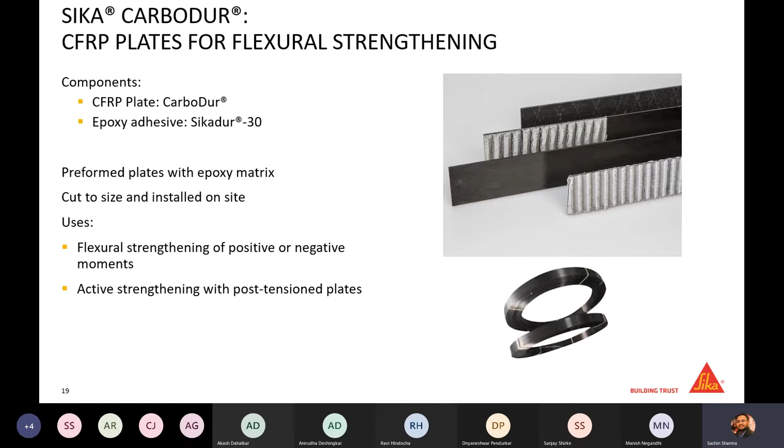CarboDur plates are fixed with epoxy adhesive called Sikadur 30 LP. This Sikadur 30 LP is basically a 25-year-old epoxy adhesive used by us. It is a thixotropic material, and it will act as a primer, as putty, as well as adhesive. So basically a multi-purpose material used for fixing these carbon plates.

You can see in the photograph how these plates are fixed in the RCC member, and this person is removing the excess epoxy post application of this FRP plate.

This epoxy has a beauty that you can apply if you want to use 2 or 3 layers. The plate on plate application can be done with the same epoxy material. You don't need to use different material, and this material can be used for steel, masonry, wood - all kinds of substrates.

If you talk about the properties of Sika CarboDur, there are different grades available in India. The surface applied CarboDur plates have a thickness of 1.4 mm and a width of 50 mm and 100 mm. In the photograph, you can see there is a name mentioned on the plate.

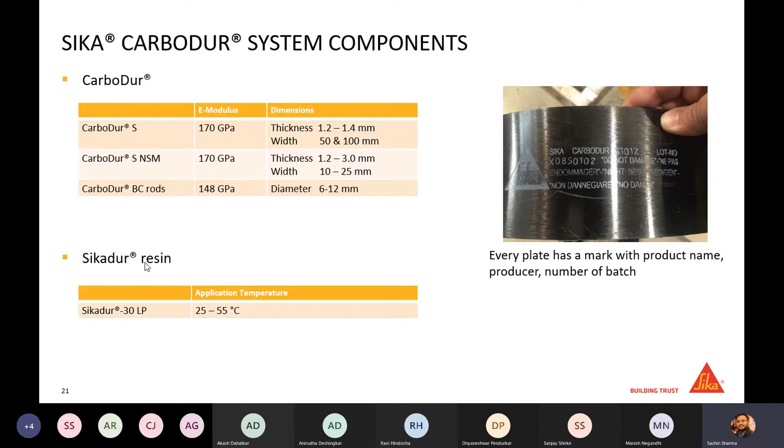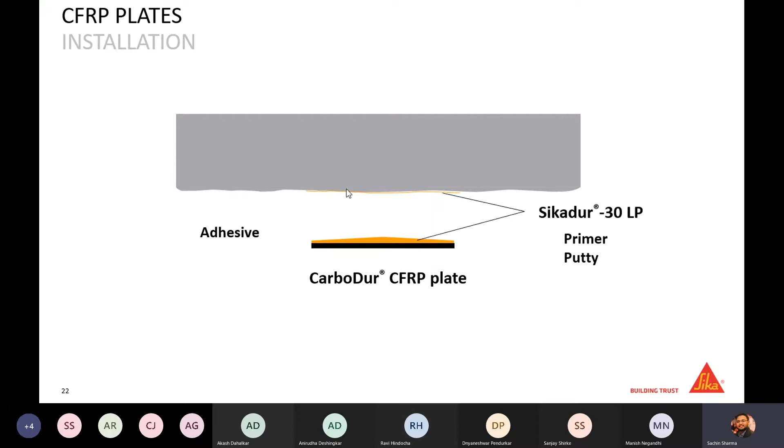For installation of this CFRP plate, if this is your substrate, first you need to put the putty of Sikadur 30 LP epoxy, and the same material needs to be applied on the CarboDur plate as well. This plate can be fixed on the RCC surface just by hand and roller.

So this is how the application of CFRP plate works. This is a very easy and fast application. You can strengthen any flexural deficiency just by pasting these carbon plates on the RCC member. So this is the beauty of this system.

When we talk about the next segment, this is called NSM - near surface mounted. The full form of NSM is near surface mounted reinforcement. In this case, we cut grooves in the concrete and fill them with Sikadur 30 LP or a different epoxy.

Sikadur 330 can be filled, Sikadur 300 can be filled. We can suggest different grades of epoxy depending upon the requirement, and we place these carbon plates. These carbon plates have different widths depending upon the deficiency, and they are fixed inside the epoxy resin, increasing the flexural capacity of any RCC member.

These are basically used for negative bending moment, like cantilever portions, where we need to fix the FRP from the top side of the RCC member. So we generally use the NSM system over there.

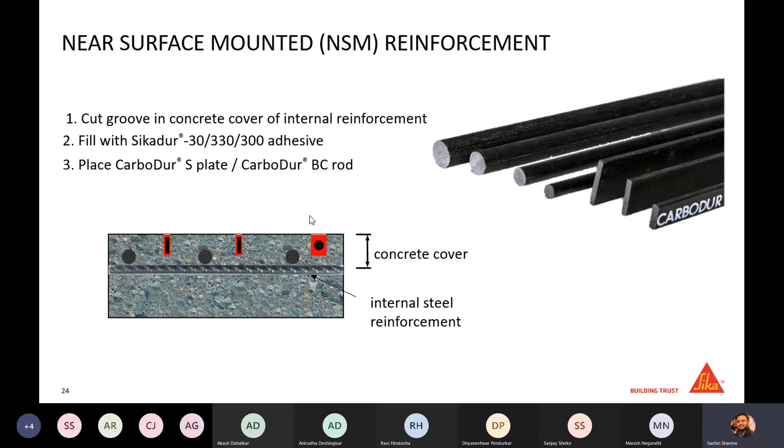If we see the different advantages of the NSM system - it is very optimal. It does not need any end anchorage because this complete system is filled with epoxy and fits inside the concrete, so no additional end anchorage is required. It is useful when the substrate quality is poor and we do not want to spend more on surface preparation. In such cases, we can just do groove cutting and fill the groove with the NSM rods.

It is actually invisible strengthening also, because post strengthening nobody can judge whether the system has strengthened or not.

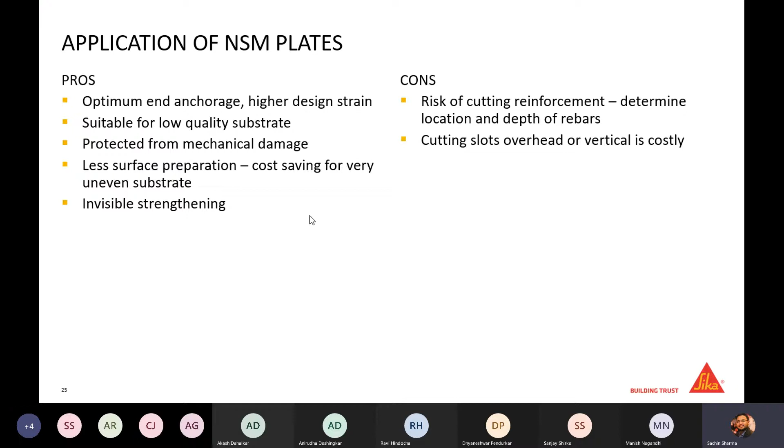Some limitation with these NSM rods is that you need to cut the RCC, and while cutting, you need to keep in mind that you are not cutting the reinforcement. So first we need to check where the placement of the reinforcement is, and accordingly we can create a groove. The cost of this groove cutting of concrete is also one of the costs in such cases. But we see a typical application when we have a negative moment in the slab, or a deficiency in the top reinforcement, where we can certainly use these NSM plates.

Where we need to strengthen masonry buildings or old structures, these NSM rods are very much successful in such areas. For wooden structures, this is also one area where NSM rods have shown positive results. One example is in Italy, where a historic masonry tower is being strengthened with this FRP NSM system, in which BC rods of 5mm diameter are being used for strengthening this old masonry building.

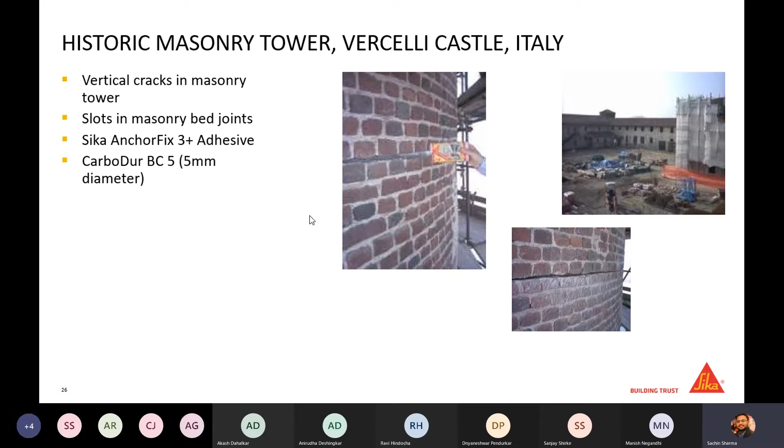Other than Sika Carbodur rods or the NSM system, we have a different system called Sika Wrap. Sika Wrap is basically a fabric kind of material made of carbon, which is used for confinement of RCC structures or to increase the shear strengthening of RCC.

These are basically unidirectional carbon or glass fabric materials, used with epoxy adhesive. There are two types of epoxy used for adhesion of this system: one is Sikadur 330 and another is Sikadur 300. I will explain in upcoming slides where to use Sikadur 300 and where to use Sikadur 330. After application of this epoxy, this fabric acts as a laminate, and it can also be used to increase the flexural capacity of the structure.

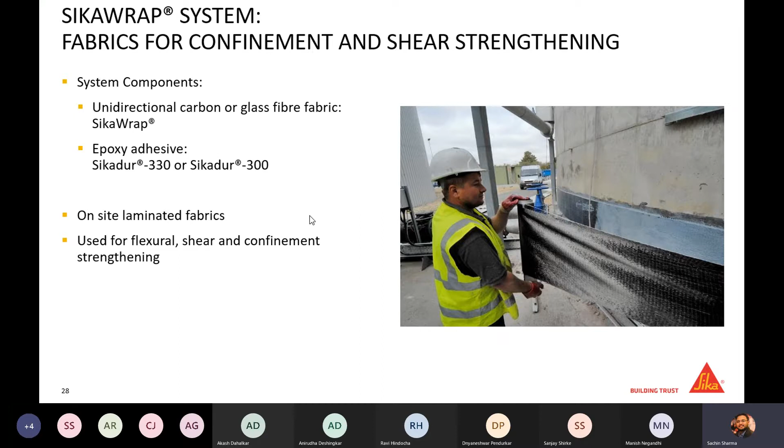But we have generally used it in shear and confinement of the RCC member, because one comparison has also been done in ACI, where if you apply 3 numbers of Sika Wrap or carbon fabric versus a single carbon plate, this system will not be economical in flexural strengthening.

When we talk about the product range of Sika Wrap, there are different grades of carbon fiber available in Sika's range. One is 230C, which has 230 GSM of carbon fiber inside it. All these values show how many grams of carbon fiber per square meter the material consists of. So 230 GSM means 230 grams of carbon fiber weight for the carbon sheet. 300C means 300 grams of weight for 1 square meter of carbon sheet. Similarly, 450 GSM, 600 GSM, and 900 GSM carbon fibers are available.

All these carbon fibers have different thicknesses and different tensile values. So once we design this FRP system, we can opt for any of the FRP fabrics depending upon the deficiency we have. We also have 2 types of glass fabric available: one is 430G and 930G.

Additionally, we have Sika Wrap FX50C and Sika Wrap 350G Grid. Sika Wrap 350G Grid is basically a glass fiber grid wrap that is used with a cementitious matrix. All the other systems are used with an epoxy resin matrix. These are 2 types of epoxy resins: 330 and 300.

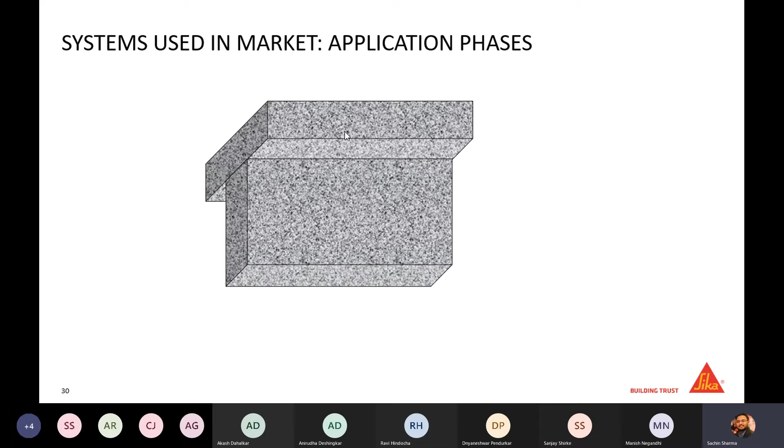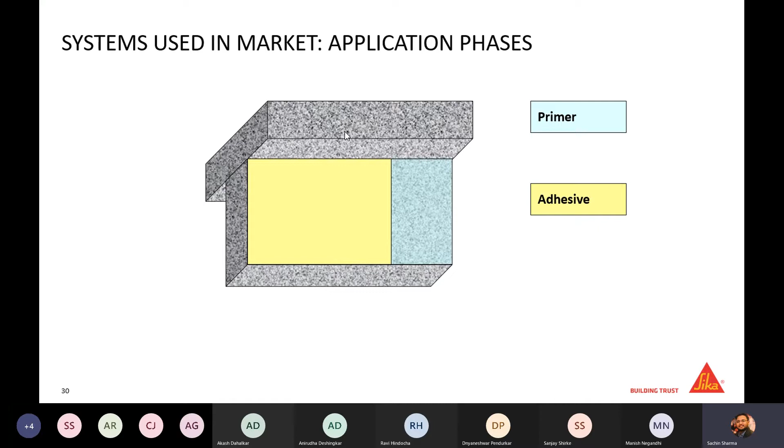So this slide I have prepared to differentiate between the systems used in the market and what Sika recommends. In the market, the available FRP system is: apply a first layer of primer, then apply another layer of adhesive on the RCC system, then apply impregnating resin, then apply fabric, and again apply resin. That means the fabric is still dry during the application, and this methodology is applicable for all GSMs available in the range.

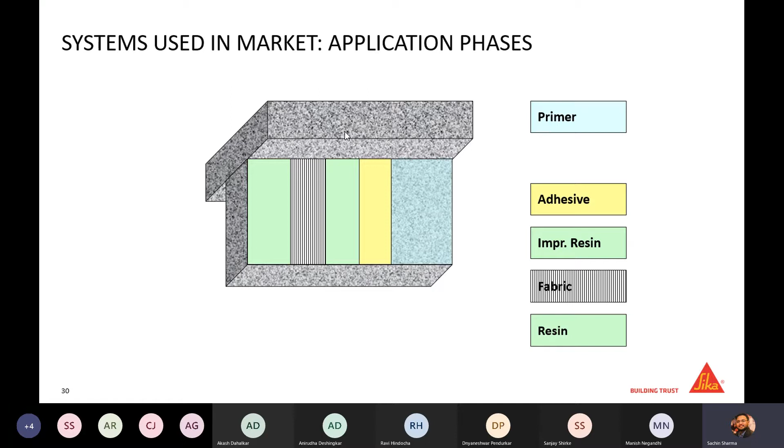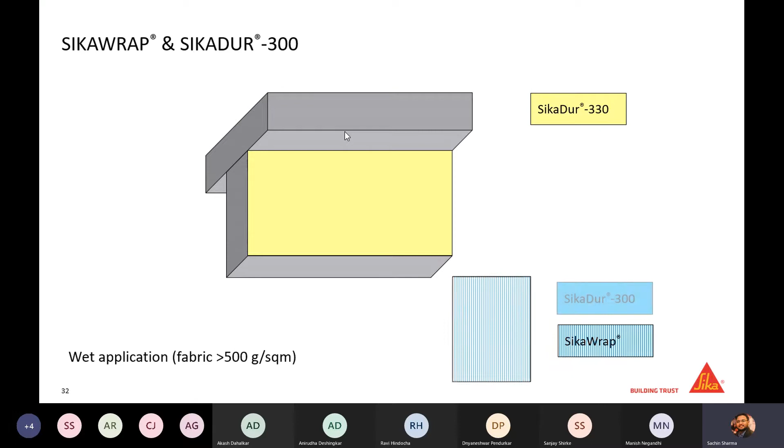What we have seen is, in such cases, the fabric will not get impregnated fully. So for greater GSMs, for GSM which are greater than 500, we always recommend to have a wet system in which Sikadur-330, the concrete primer, needs to apply on the concrete surface, and this SikaWrap needs to be wetted properly on the floor before application on the RCC surface with Sikadur-300 impregnating resin. Once this is wetted, we apply this wet wrap on the RCC system. This is called a wet layup system.

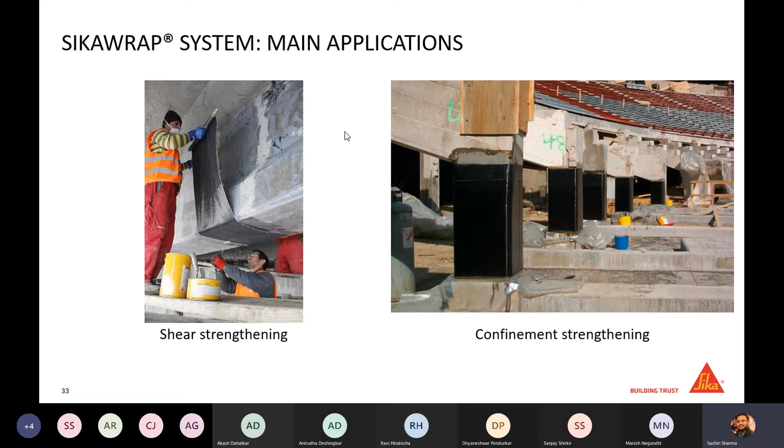This is being used for shear strengthening and confinement of the column. We can have different types of application or different types of systems for increasing the shear capacity. We can have 3 sides of confinement, 4 sides of confinement, or 2 sides of confinement, depending upon the site availability.

Next product, or the next solution in terms of structure strengthening, we offer is SikaWrap FX. This is one of the beautiful products that Sika only provides. No other manufacturer offers this kind of material in the market currently. This is basically a carbon fiber string, having 50 grams of weight per meter, and this material has a variable application.

This is a very multi-purpose product and can be used in shear, flexural strengthening, and confinement as well. It can be used as NSM. It can be used everywhere. That means this is a single product you can use in any location, anywhere you need.

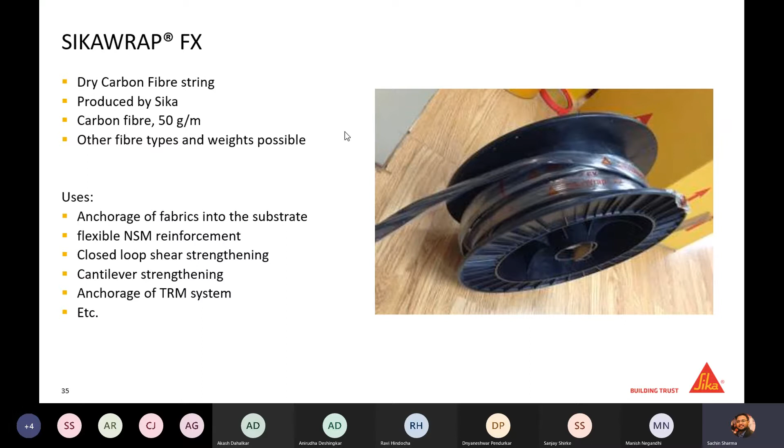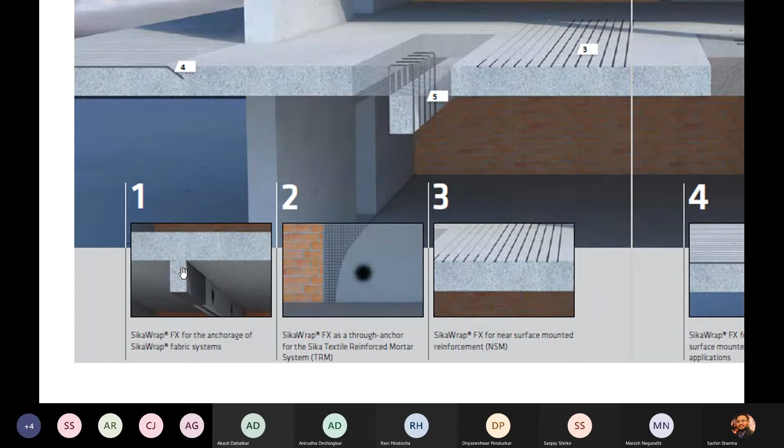But you can see here in the picture - is it visible, is it readable to all? Because I think the lines in the bottom portion of the slide are not readable to me. I will try to zoom it. Now I guess it is visible.

So you can use it as an anchorage for the FRP system. You can use it as a through and through anchor for textile reinforced mortar system-based applications. You can use this system as NSM, like this.

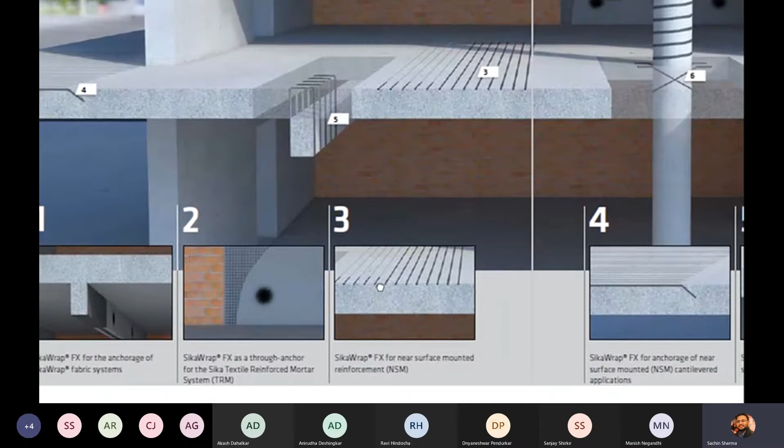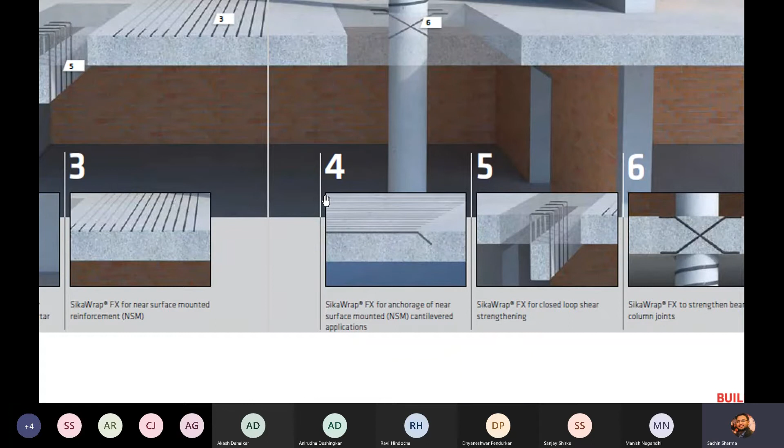You can use this system as negative reinforcement in area 4 here - we have used it as negative reinforcement. You can use this system for increasing the shear of the beam, like they have used in number 5 here.

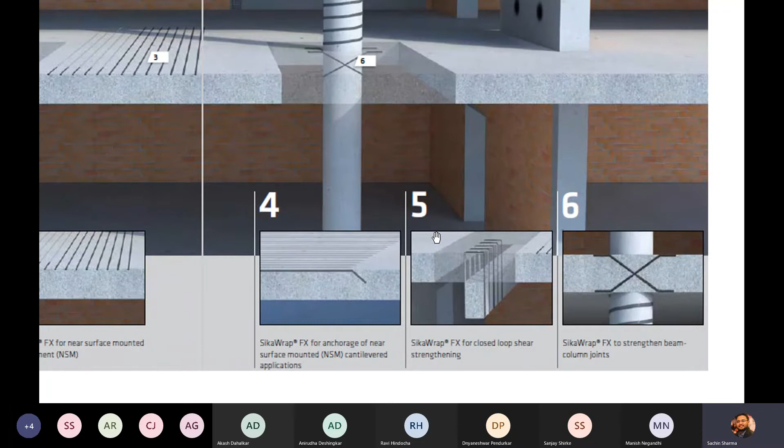And this column and beam joint can also be strengthened with this FX50 product. So this is a very beautiful product that Sika offers, and this is the only company that offers this kind of fabric string.

So if you compare two systems in which the beam is 4 sides wrapped - one with SikaWrap and another with SikaWrap FX - for application of this wrap you need to cut this slab and then apply the wrap, or you can have 3 sides of layer, you have 2 options in this system. Whereas in the SikaWrap FX system, you need to drill this and fix the string, and post application nobody can see that this beam has been strengthened with FRP. So this is a very wonderful product.

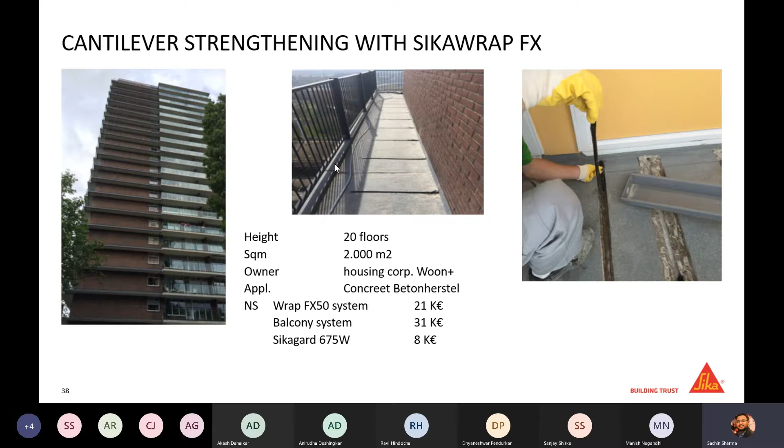So this is the reference where we have used this FX50 for strengthening of this cantilever balcony, where we have put it on the negative side of the slab.

So what we have understood is we have CarboDur plates and NSM plates, which are being used for flexural strengthening. We have Carbo shear, or Sika wrap, which are being used for shear strengthening. We have Sika wrap FX, that is a multi-purpose product, and it can be used for flexural, shear and confinement in all cases.

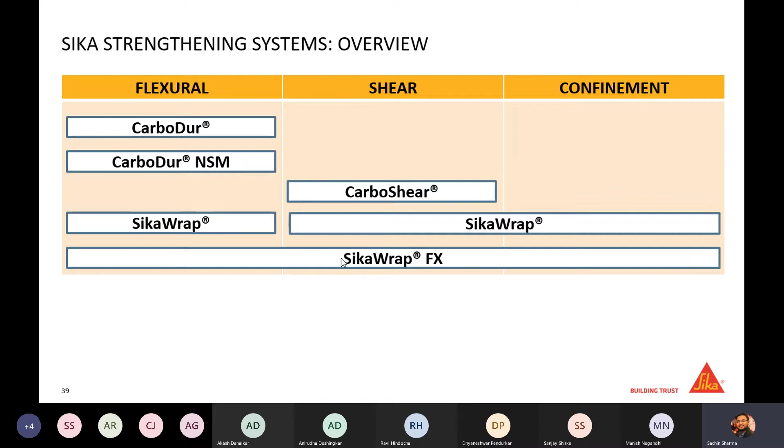Then we talk about why Sika. As I said, we have been in this industry for the last 25 years, and we have a large number of project references. So Sika has very rich experience in this subject. This is why we can say we have expertise in this subject.

The quality of product we offer to the market is a very high standard product. The glass transition temperature is greater than 100 degrees Celsius. This is a unique thing that Sika is offering to their customers.

Testing of durability. We have undergone various tests for our products and we have seen it is very much durable for more than 20 to 25 years. One of the testing is still going on from 1980s till date in Switzerland, for Sikadur epoxy adhesives, and we are testing this epoxy adhesive for durability of 50 years.

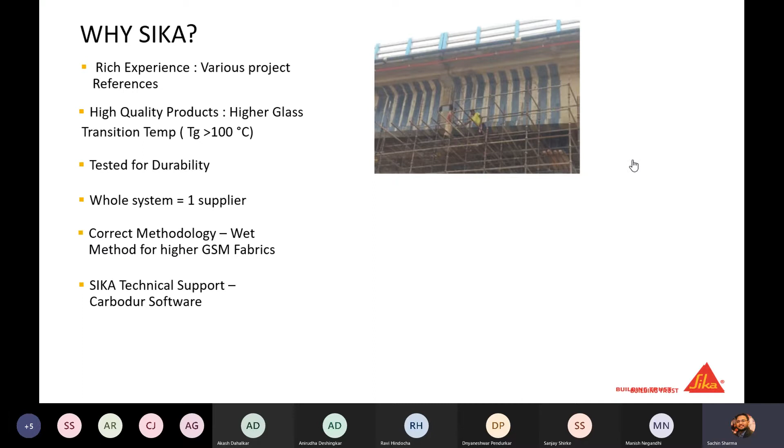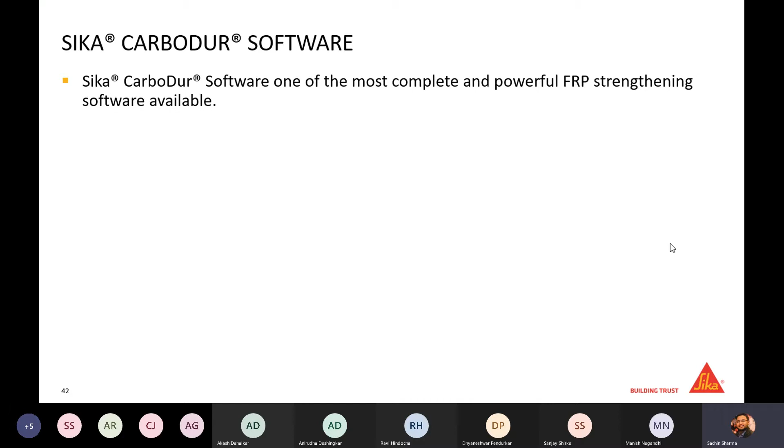Coming to the Sika CarboDur software introduction - people have already installed it, so I will not take much time introducing this software. However, I can say this is the most powerful tool available currently in the market for designing this FRP system. It is available free of cost at Sika.com or the Sika India website, and it is available for 15 days post downloading. Once you do the online registration, it will be licensed for you freely. So it has 5 modules.

You can select any of the 5 modules for designing this FRP. First is the carbon fiber column - the axial capacity increment of column. Second is the flexural increment of beam. Third is shear increment, or shear deficiency if it is there in the beam. Fourth is also the same, the flexural deficiency in the beam.

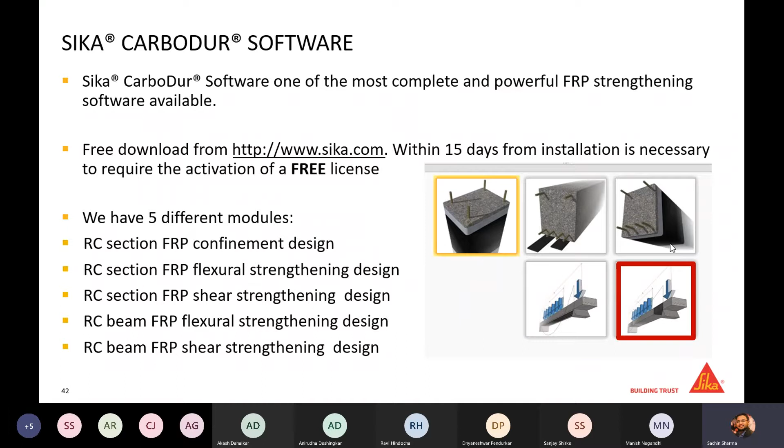But if you have variable loads in your structure, then you can opt for the fourth one. Similarly, if you have variable loads with shear deficiency in the beam, you can select the fifth one.

When we talk about the advantages of the CarboDur software, this is a very professional software. You can design or produce different sections using the software - there is very little limitation on using a different variety of sections. You can use T-beam, I-beam, and different sections like this. Complex geometries can easily be done with this software.

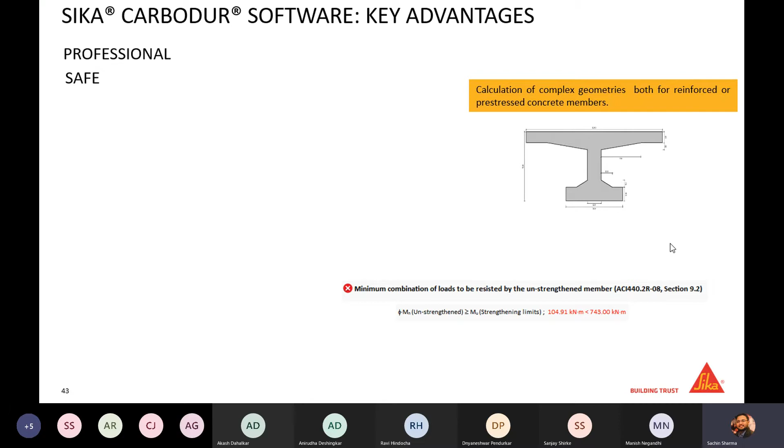This is safe because it shows you an error when you design anything wrong - the software would not allow you to proceed. So once you use this software, you will also see that if you are putting in an incorrect value, it will not allow you to move further. So that is why you can say it is safe.

It is user friendly because it has very good graphics. You can easily understand it using the graphics, and if it is not clear, you can select any section and a tab will appear where you can read about it. If it is still not understood, there is a help tab available on the top right of the area - you can select it and get detailed help. So this is a very user friendly software, and every structural engineer can easily understand it very well.

It is free of cost. It updates automatically, and there is no black box available. All the reports, all the results that you generate, are produced in PDF format, and this report will have the complete formulas based on ACI 440 or whatever code you have selected.

You can use different codes for designing this FRP using this single software, because this is a global software. So people use the same software for different industries, for different codes. So what I was telling you is there is no black box - all the things are clear in the report.

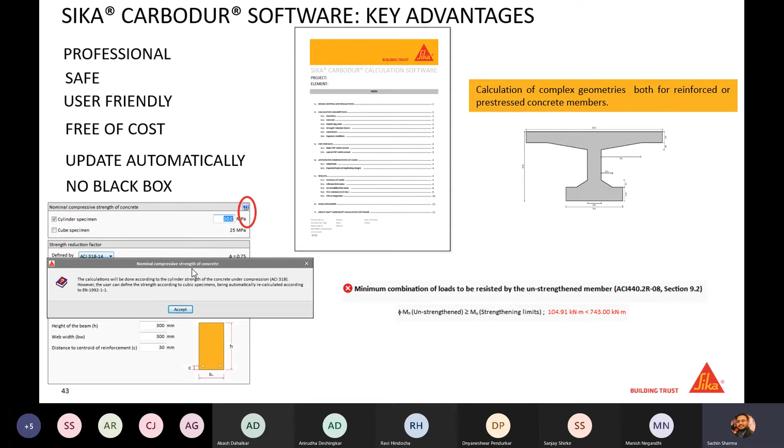So moving toward the FRP design, I wanted to ask if there is anything not clear in the presentation till now, or otherwise we can move further to the designing part.

I think it is 2:22 and there is only 20 to 25 minutes, 20 minutes left. I will move a little faster.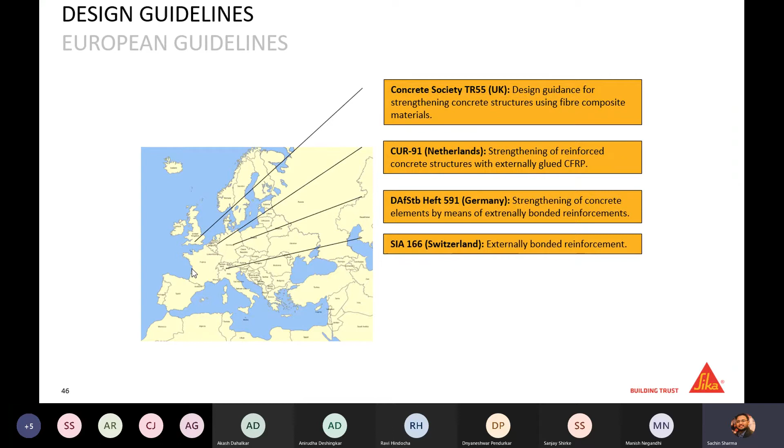Talking about the design codes, there are European design codes for different European countries. The UK uses TR55. Netherlands uses CUR91. Germany has their own different codes. Switzerland uses their own codes. All the major European countries are using their own codes.

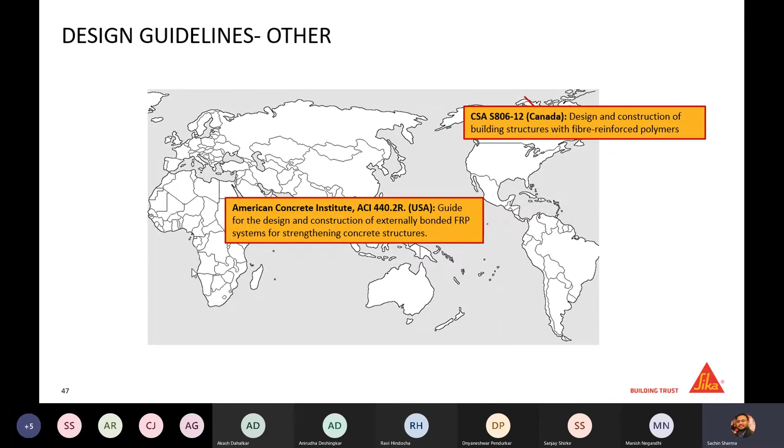India is using the American standards, so here we are following ACI 440.2R only. Canada is using their own code, and Japan also has a different code.

So here today in our presentation, we will discuss ACI 440.2R, which is commonly used in India. It covers the design for flexure strengthening, for shear, for confinement, for increasing axial capacity by confining a column in case of axial loading, and in case of eccentric loading you can also use this. ACI also refers to shear wall designing and seismic strengthening, but I will not discuss about the last two. I will only discuss the top four: flexure, shear, and axial and eccentric loading pattern.

For flexure, if you refer to chapter 10 of ACI 440.2R, it is documented that FRP can increase 10 to 160% of flexural strength. The design moment after application of FRP will be the sum of the existing moment of the RCC member plus the moment induced by the FRP laminates. You can directly add this by multiplying a reduction factor to the capacity of the laminate. So MNF, the moment capacity of the laminate, multiplied by the reduction factor, added to the existing moment, gives the complete moment capacity of the structure.

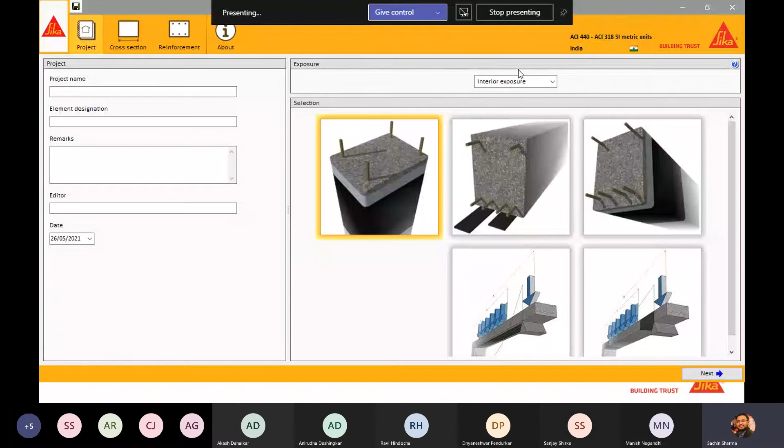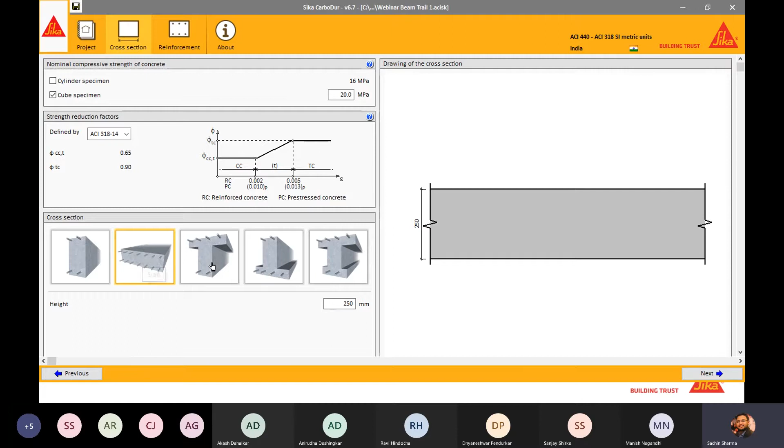Yes, so I'm selecting a beam for flexure. You can write the project name here, the element designation like beam B1, and then select the cross section, which is 450 by 300. You can add the width and the height here. If the beam is not there, if it is a slab, you can select this option; if it is a T-beam, an inverted T-beam, or an I-beam, you can select any of these sections. I'm considering here, as per my problem, a 450 by 300 beam, and you need to put the compressive strength here, which is the cylindrical specimen or the cubical specimen, because in India we use the cubical specimen. So we put here 20 MPa.

The European countries are using the cylindrical specimen. You can use this as well if you are having the value of cylindrical specimen with you.

For bottom, we have three reinforcement of 16 mm dia. This is the cover of 30 mm, but you can change it by 40 mm or 25 mm depending upon your structure. The grade of steel, which is 250, 415, 500, you can select from here. If you don't want to use number of bars, you can select the area instead, meaning you can select the area in mm square as well.

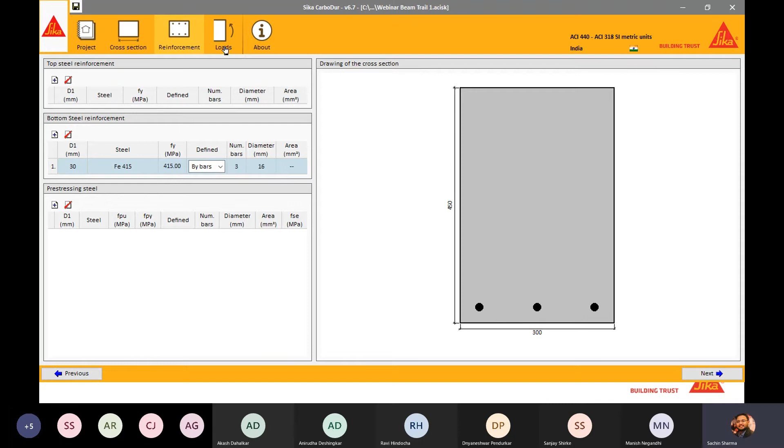But currently I am using 3 numbers of bars with 16 mm dia. So I am currently doing it for the positive bending moment, and this is the unstrengthened section capacity, 87.42, the capacity of the unstrengthened section.

By putting the values here, the values of moment of dead load and live load, we can get the anticipated load values here. If we have increased the value by any chance, you can see there is an error which is showing here. So you can increase the capacity within a limit so that it will not show any error.

Now here we wanted to increase it from 87 to 111, and by selecting the laminates, you can have different types of laminates available. 514 means a 50 mm wide laminate. 1014 means 100 mm thick, wide, 100 mm wide laminate, and 514 is 50 mm wide laminate.

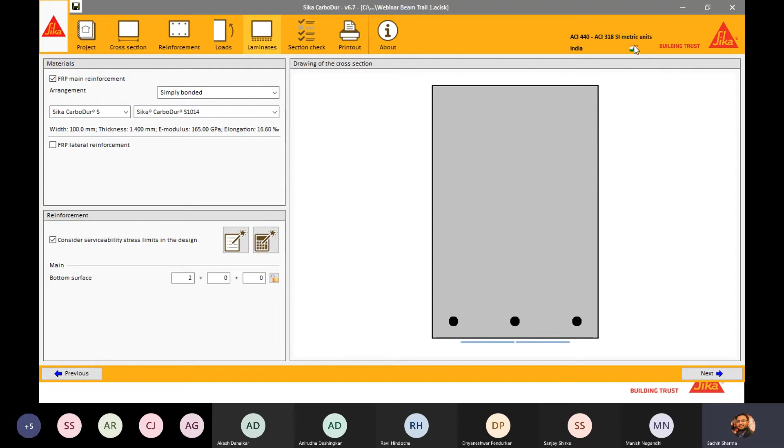14 means 1.4 mm thick. So all these are 1.4 mm thick laminate, and the width of the laminate is 50 mm, 100 mm, and 120 mm. You can select any of the available material, because all these three materials are available in India, and I am using this software for India.

That is why it is showing only 3. If you select any other country, you will see a long list of material depending upon the different countries. By selecting here, we can have the 3 options. We can use 2 numbers of 100 mm laminate or 4 numbers of 50 mm laminate. The area will be the same in all cases.

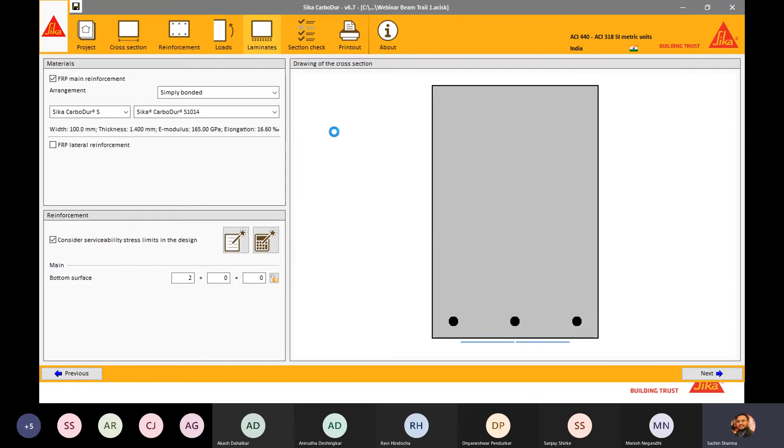Post application of this FRP, we have seen this strengthened section has a moment capacity of 120. The X, which is the neutral axis depth, is 138 mm.

This is how we can get the printout here. So if you see all the calculation here, there is only one layer of 2 numbers of laminate, 1.4 mm thick and 100 mm wide, which is to be used for strengthening this structure. Post application of this, the structure is now able to take care of a load of 120 kilonewton meter. However, the ultimate capacity of the beam is now 145.

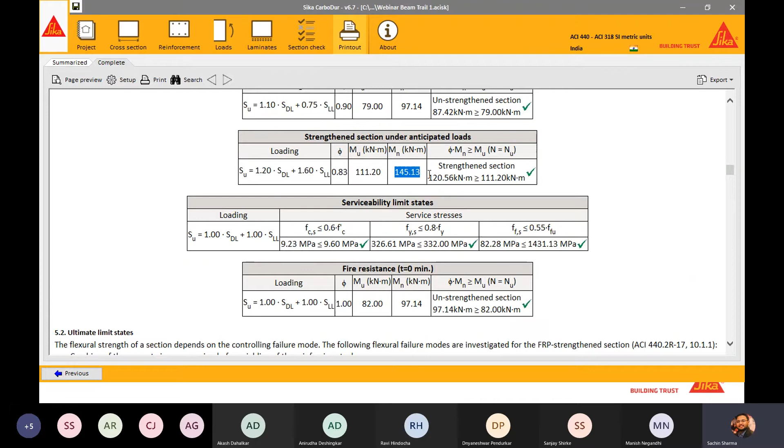It is being factored by 0.83, and then it is coming to 120.56. You all are engineers, you well understand that this factor is very much required, because this is the ultimate capacity. But if you are comparing the ultimate capacity of the beam, please consider this value. Otherwise, you can consider this.

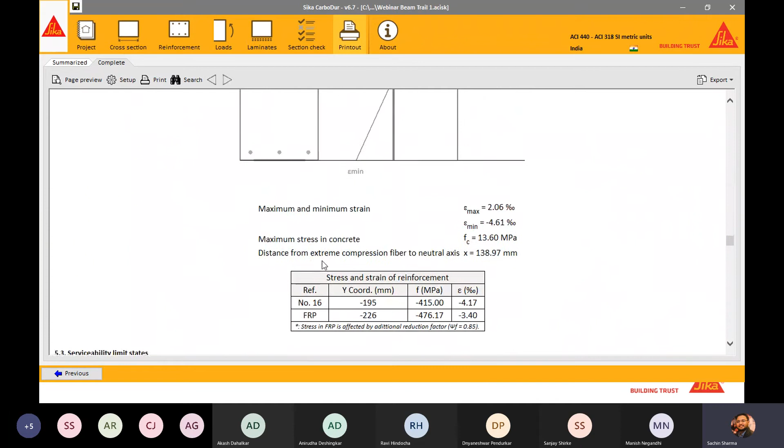This is how you can see the report in which all the calculations are there, and you can refer all these calculations with the ACI code, which is ACI 440 2R. So moving to the presentation again.

If you have any query, please raise it. Otherwise, I am moving to the shear reinforcement now. I think Chetan has a query.

Is there any benefit in deflection, to control the deflection? No. No. If it is a deficiency in deflection, in such case we need to improve the depth of the section.

Okay, it is actually, you need to understand, is it actually a reinforcement you are applying only on the external side of the beam? So it is, some the serviceability check I saw in your file. What, that's why I asked.

Serviceability is checking the stress, I didn't get that one. Yes, stress, it is there, and this is there in the software because it is checking for serviceability.

So the maximum serviceable stress in the concrete, in the fiber, or in the steel, it is checking. But Sachin, those fibers, the plates which you initially mentioned, and you also mentioned that those can be post-tensioned, do those help in reducing deflection or not? Because you are applying a tension force.

We can have a different combination of different systems. If there is any particular project, or if we have a particular deficiency, we will definitely see what are the other options available. We can combine all these options and get the solution for you, or we can have a discussion depending upon the project requirement accordingly. But definitely we can increase the serviceability of the structure.

But I'm saying if there is a deficiency in the depth of the beam, or the area of steel has also reached the maximum point, you cannot increase the AST now. The capacity of the beam is at the maximum limit. In such case, you need to increase the depth of the beam. This is the only area where we have a limitation. Otherwise, there are n number of options where we can increase the capacity of the beam.

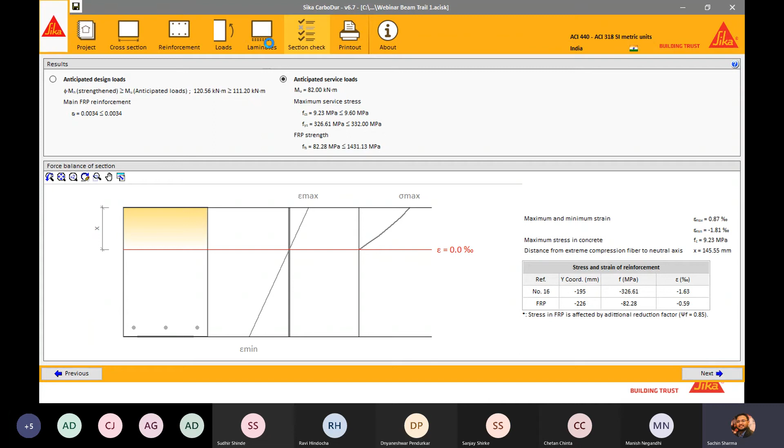But is there any control on the load factors, can they be put as manual? Definitely, you can use user type manual because there is an option - I can show you. If the software is visible to you all, you can select the load. Go to the load tab, and beneath it the combination is there. Here you can select the default ACI combination or user defined combination. So you always have the freedom to change the combinations.

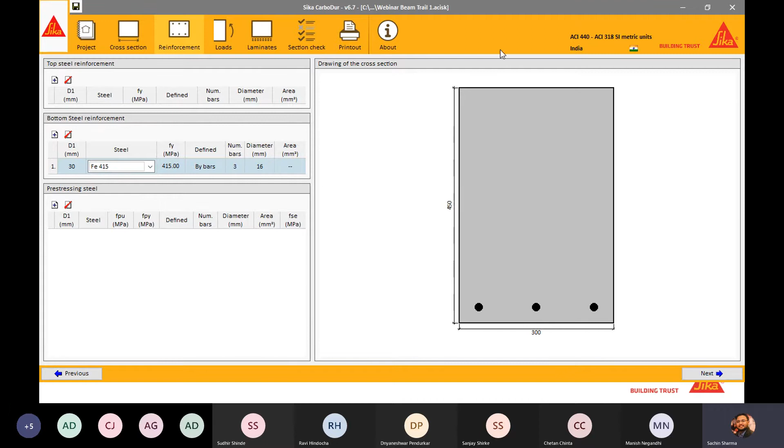Also in reinforcement, if you do not want to use FE415 or FE500, or if you have a different grade available - there are some professors studying the durability part of the building, and they considered that the grade of steel was initially designed for 415, now it is reduced to FE300, so they are putting the current grade of steel as FE300 as well. In such cases, you have that freedom too. You can select the steel grade, and if you go to the last option, there is a 'user' option where you can change the grade of steel as per your convenience. So you can use it, no problem.

So moving to the shear strengthening, is there any question on the flexural part?

Like, our beams are there, suppose that is a part of a link beam, lateral system. Since earthquake forces are to and fro, the top will be tension and again compression, changing continuously. If we have wrapped the fiber and compression force is there, due to the compression force, is there any damage to that fiber? No, no. Actually, in compression also it will be intact. You can refer to the ACI code - there is a chapter known as seismic strengthening. If you refer to that chapter, you will get clarity in such a case.

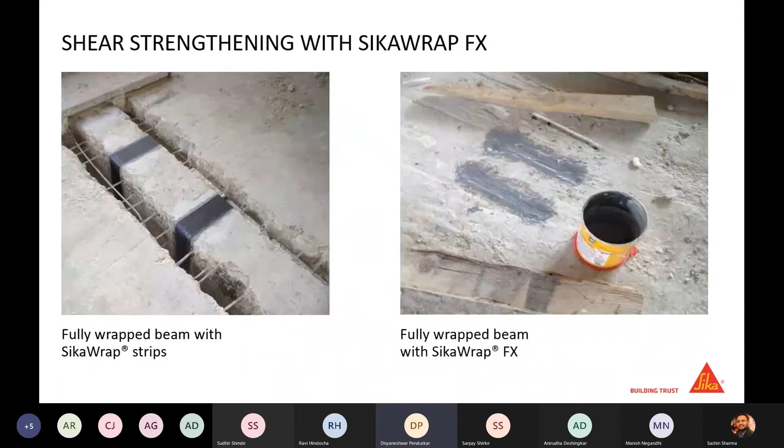In such case, you need to cut the slab and keep the wrap on the complete side of the beam. This is how. Understood, sir? Okay, okay, okay. So that is purposefully done.

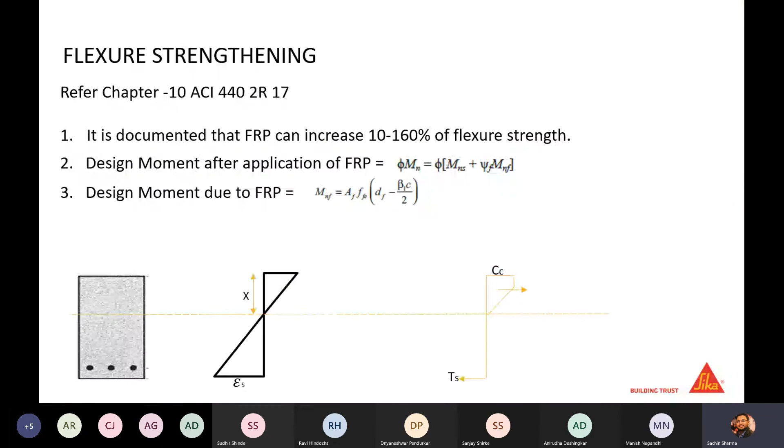We usually opt for 3-side confinement with an additional factor of 0.85, because cutting the concrete will be a task. Adding a fiber will not be a task, but only adds to the cost.

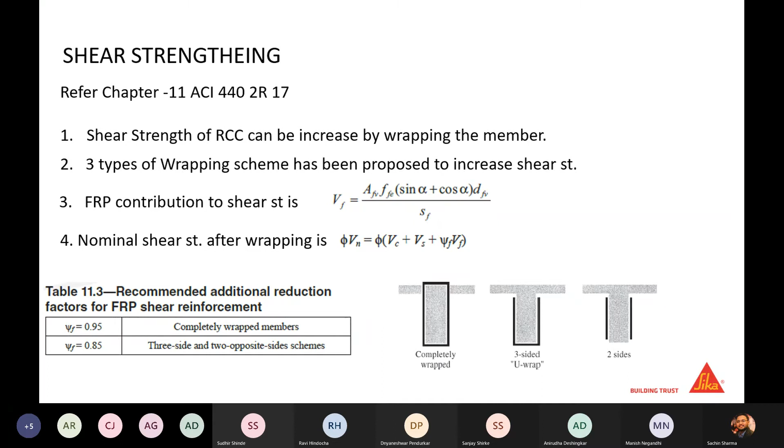So moving to problem 2, where you have a T-beam, 600 by 300 mm size, slab thickness of 150 mm. I have considered a 3-side U-shaped wrap. The existing reinforcement in the beam is 2-legged stirrups, 8 mm dia, 130 mm spacing. The unstrengthened section capacity was 256, and I wanted to increase the capacity by 40%.

These are the steps you need to follow as per ACI 440.2R: you need to calculate the design material properties just by multiplying the factor, and another formula for calculating the strain. If this strain is less than or equal to 0.004, then you select the epsilon FE. If it is greater than this, you select 0.004, and this epsilon FE is used for calculating the VF, and then you can calculate the nominal shear strength.

But in our software, you can do it very quickly. You don't need to have Excel, or you don't need to have the calculation on your calculator. I'm going towards the Sika Carbodur software again for calculating the shear part.

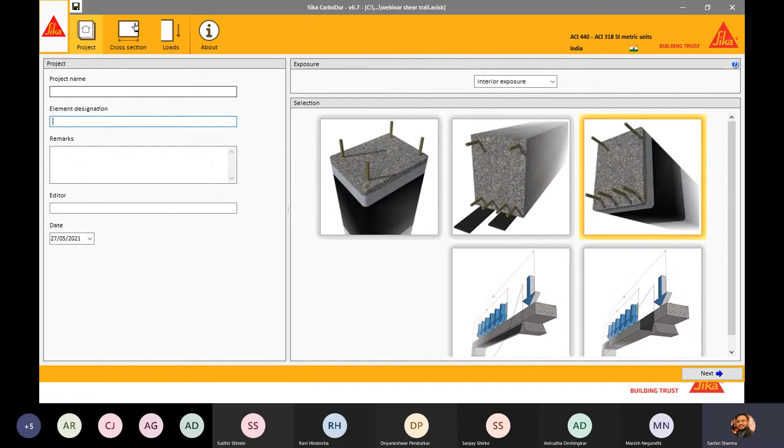So this is the section that you need to select for shear. You can put the project name, element name here. Similarly, as the earlier case, compressive strength can be put here. If you want to use the user option, that is also there. I am considering ACI 318. Different sections are available, but I am considering this section because I only have access to 3 sides.

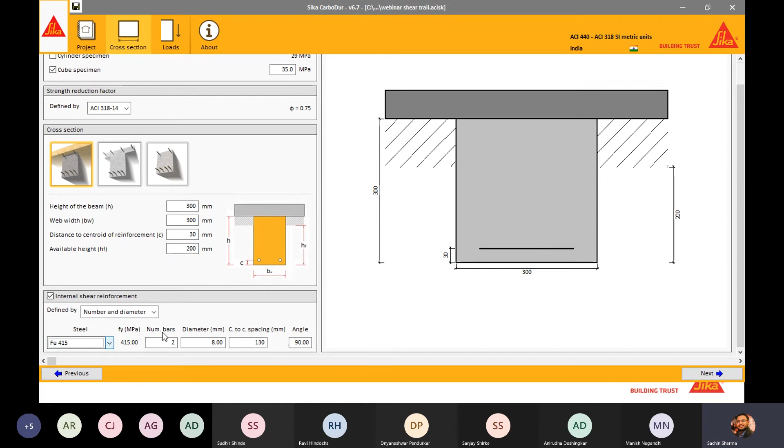This is 300 mm height of the beam. Width of the beam is also 300 mm, and the available height is only 200 mm. So I have considered a 415, 2-leg stirrup, 8 mm dia, 130 mm spacing. This is the existing reinforcement.

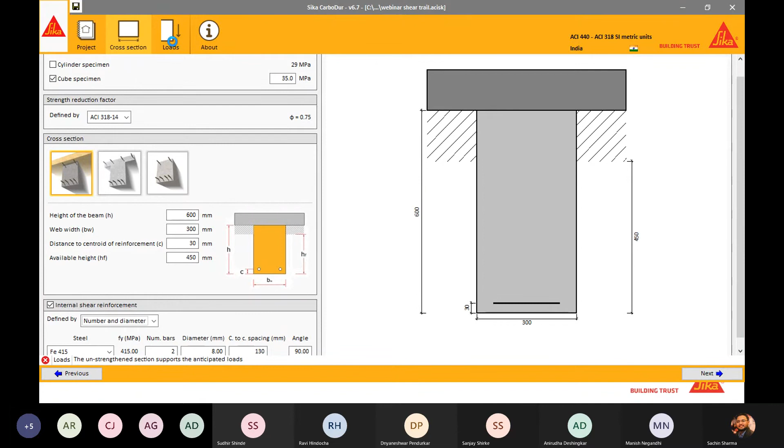So what was my problem? I guess I need to strengthen from 256 to 360. 300 mm size - okay, the size is also not correct here. Slab. No, so the unstrengthened section has a capacity of 256, and I wanted to increase it by 40%, which is 360 kilonewton.

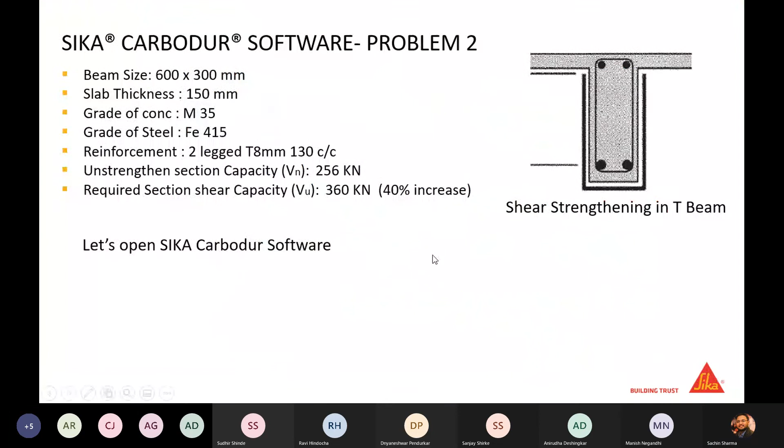So I can write here 100, 392 - a little less, 376 - a little more, 144. So this is how you can put the values here and get this anticipated loading as per the required value, and you can select the laminate here and get the calculation done for the 3-side wrap. Because this gives a higher number of layers, which is 3 layers of 230 GSM, I am opting for 600 GSM of 50 cm width, and now it is coming to only 2 layers of 600 GSM.

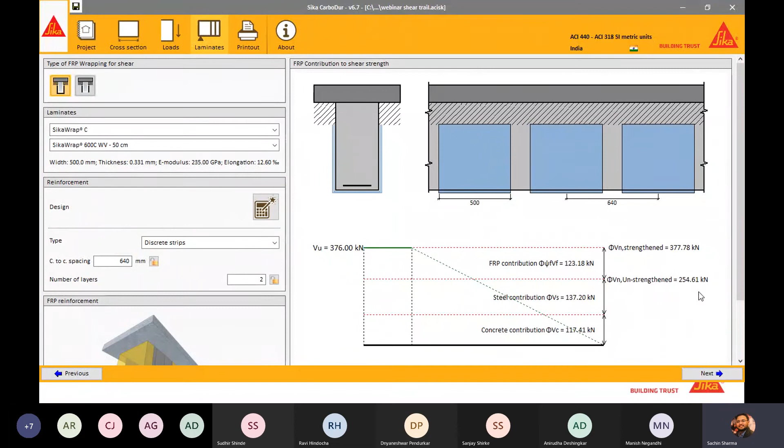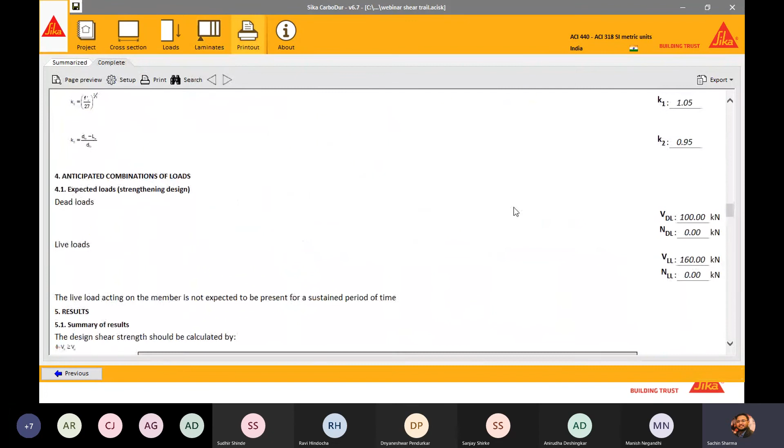Shear stirrups are required. You can take the printout from here, and you can see the unstrengthened section capacity was 254. The shear FRP contribution is 123 kilonewton. These all keep the factors as per the ACI. You can see the calculation here, the complete calculation.

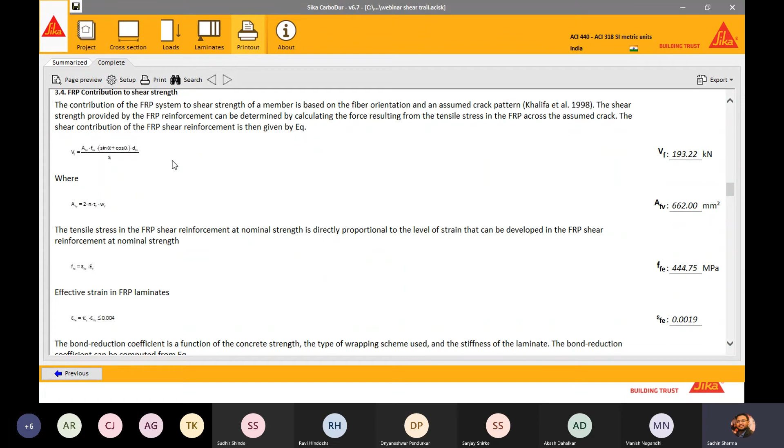If you refer to ACI, the complete calculation, you can see the same formula, which is the FRP contribution, the area of FRP, and this is the effective strain in the laminate. It was less than 0.004, so it is considered as 0.0019. That is why this is the loading that we have put.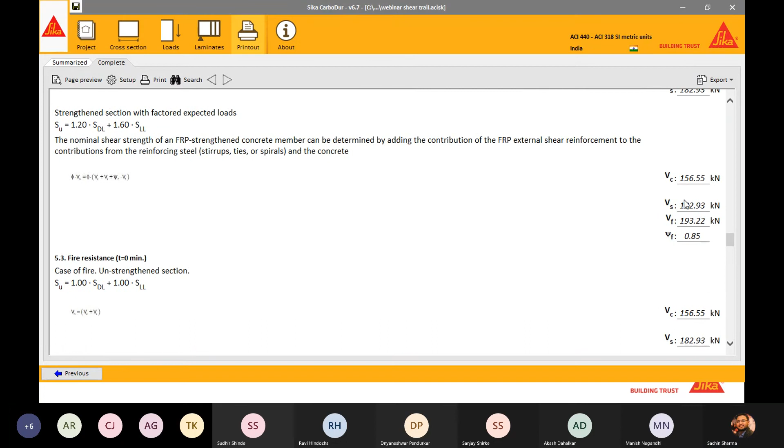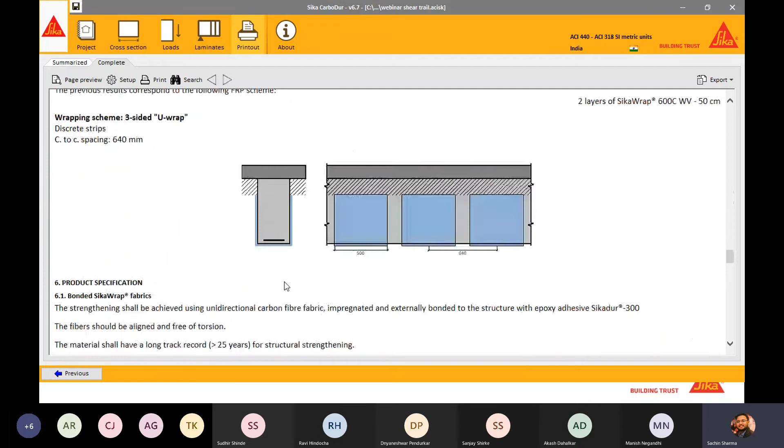This is the shear capacity of concrete. This is the shear capacity of steel. And by multiplying the additional factor, it has calculated the VM, which is 156. So you can see the complete details are there. Once you read the document, you can easily understand what it is. Please refer to the ACI code, then you will be able to easily understand all these formulas and all.

Is there any confusion in shear?

Moving to the column with pure axial capacity increment. If you refer chapter number 11, there is a case where you can increase the axial capacity of load by confining the column. The capacity of column post confinement will be given by this formula, and this is limited to the cross section area, because FRP contributes very well for circular columns.

If it is a rectangular column, the contribution will be less. That is why an additional factor of contribution, which is a shape factor, is applied in case of rectangular column, whereas for circular column, the formula is the same, shown here, where D is the diameter of the column, FL is the confinement pressure, and FCC dash is the maximum confined compressive strength.

So what we have done is we have increased the compressive strength of column from FC dash to FCC dash by creating the additional confinement pressure. This is the ratio you need to check: FL by FC dash should be greater than 0.08. This is the method as per the ACI.

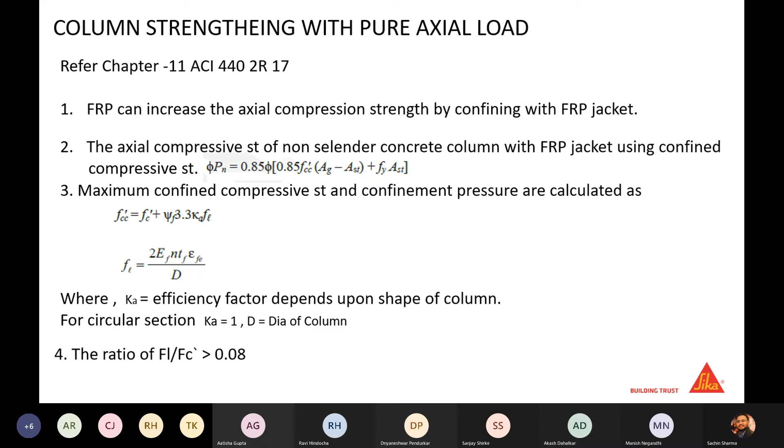For rectangular column, ACI says you need to consider this rectangular column as an assumed circular column with a diameter D, and you convert this into a circular column by calculating the additional shape factor, which is Ka and Kb. This Ka and Kb can be calculated by these formulas, and the ratio AE by AC is calculated by this formula, from which you can calculate Ka and Kb.

Post calculation of shape factors Ka and Kb, you can calculate FCC dash, which is the compressive strength of confined concrete. And post calculation of compressive strength of confined concrete, you can get P, which is Pu, the capacity of the column.

Moving to the third problem: column size of 400 by 400. Grade of concrete is M25, steel grade is Fe 500, 12 bars of 20 mm dia, and we need to increase the capacity by 50%. This is the case of pure axial.

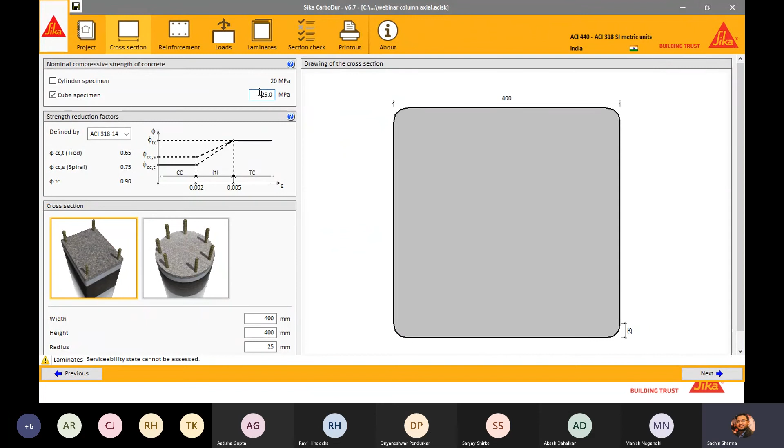So this is M25 grade of concrete, rectangular column, 400 by 400, and the reinforcement I have already written. You can also write, if you write 2 here, you can see 3 on the y-axis, and if you write 2 here and 2 here on the x-axis, that will be 4 total. So please note, don't put the values just by the numbers. See the drawing and then put the value.

This was the capacity of the column, and we need to strengthen this column up to this capacity. By selecting this, you can have a single layer of 600 GSM.

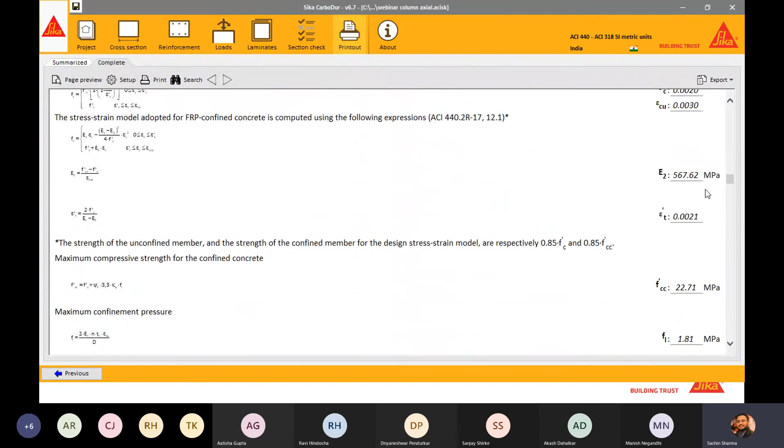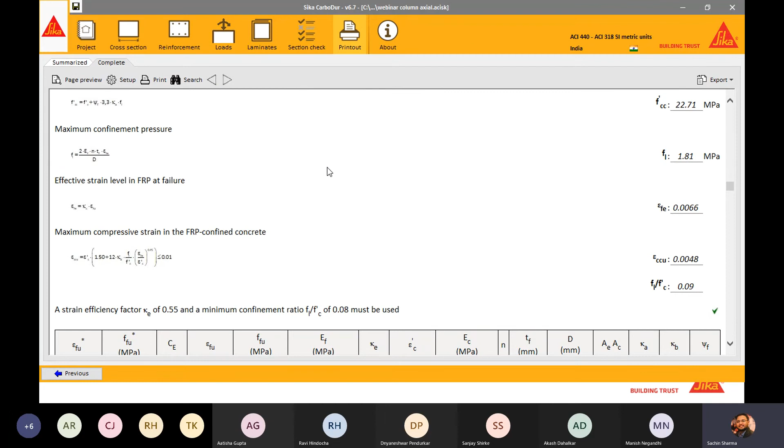So this is how you can see the values and take the printout of all the values. This is FCC dash, the confined member compressive strength, and maximum confinement pressure, calculated by this formula. All these formulas have been calculated automatically in the software, and the factor FL by FC dash should be greater than 0.08.

I will show you if I increase the capacity or loading, say it is 1000 which is required. In such case, two numbers of 600 GSM wrap are required. If I write one here, see it is showing error: the strengthened section does not meet the requisite condition. So this is how the error shows in the software, and you cannot take the printout if you are not doing the right design.

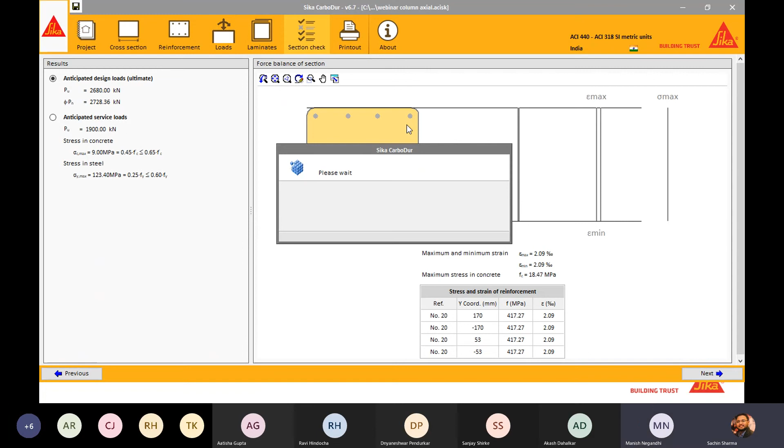Moving to the PPT again. So this was the formula as per ACI. FCC dash was calculated by this formula, and confining pressure is calculated by this formula, and this is how you can derive the number of layers. So the software is 100% based on this calculation, so you can cross check anytime and see the results.

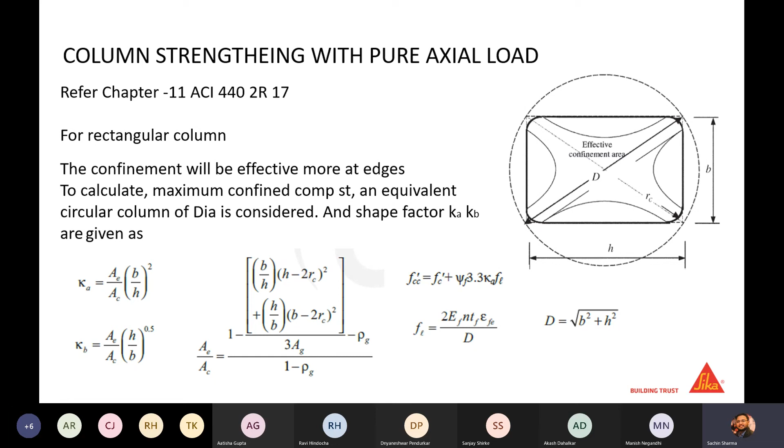This is based on ACI only, because ACI says if the length and width ratio of the column, that means the L by H ratio, is greater than 2, that means one side of the column and the other side has a ratio of more than 2, in such case you cannot use ACI, because as I showed you, the effectiveness of the confined area will be less for the rectangular portion. If the H by B ratio is greater than 2, ACI does not say anything, and it says that you should not use these formulas for H by B greater than 2.

If the column has one dimension greater than the other by 2 times, you can use another code, your European England based code, TR55. In such case you can use that, or you can use FIB guidelines. TR55 also does not allow you to do in such case, but FIB 14, this is another guideline for FRP design. So in that case, you can use FIB 14 for column axial strengthening.

If you have an eccentric loading, this is a very typical case. You cannot do eccentric loading case by calculation alone, because you need to plot a graph in such case, and for problem 4 I have considered here.

The interaction curve you need to maintain, the simplified curve of interaction, the interaction curve of the unstrengthened column ACI has drawn. Then they have calculated the factors and plotted the interaction curve for the strengthened section. So manually you are not able to plot an interaction diagram for each and every column. That is why for eccentric loading columns, and we have lots of problems with eccentric loading columns, the software is very much helpful.

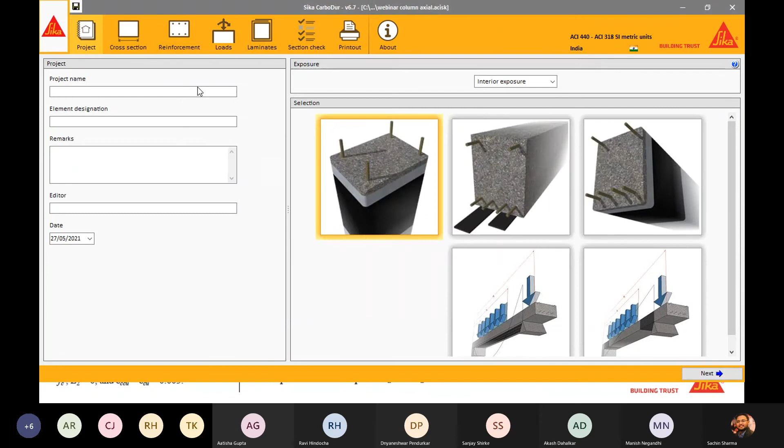Now I am moving towards the eccentric column. The column dimension is 400 by 400, the same. This is how you can see I have additionally added bending moment X and Y. This is the diagram you can see for the anticipated load.

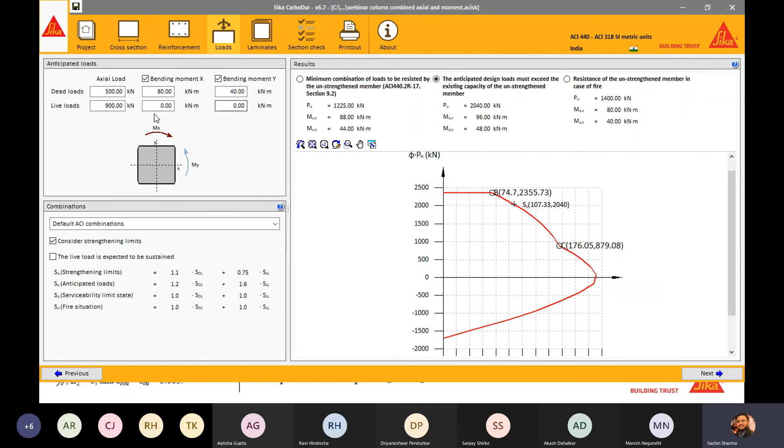This value is going outside this curve, which is why it needs strengthening. This is just at the verge, but we can increase up to more. For that, we can have 600 GSM of 2 layers of wrap, and the capacity of confined concrete is shown in this diagram. You can see there is an interaction curve for confined concrete and for unconfined concrete, and this was the point for which we were designing the column.

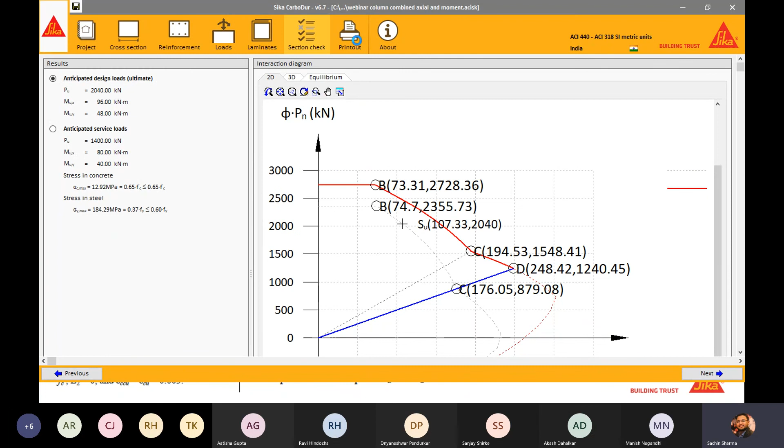So this is how you can understand that this eccentric column can also be strengthened using this Carbodur software. This is how we design FRP with ACI 440.

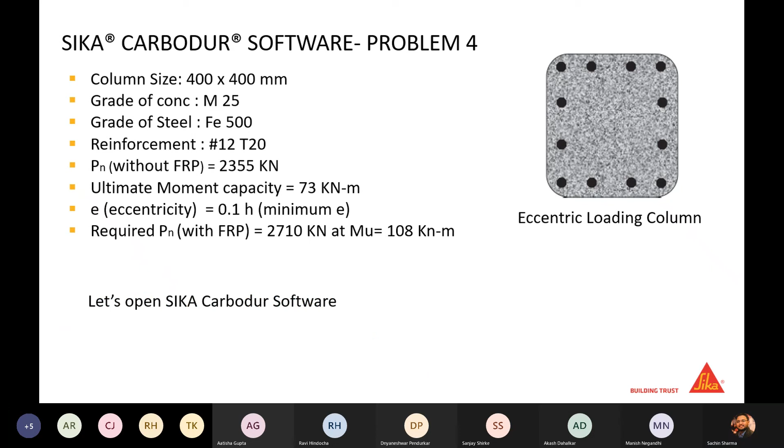To refer to ACI guidelines, you will definitely learn more, and you will have more queries, and then probably we will be more interactive in such case. But thank you very much for your time and attention, because I have taken more than 1.5 hours, or I guess 2 hours for this session. So sorry for that. But if there is any query, please raise it, and otherwise we can close this session now.

Hi Sachin. Yes, it was quite an interesting session. We'll try our hands with the software, and I'm sure people will have many queries to ask.

Before going on to that technical part, may I ask, once we are done with structural strengthening using these fiber wraps, do we need to provide any external fireproofing for the system if the carbon strips remain exposed to the atmosphere?

For fire, definitely this system is based on epoxy, so epoxy has a limitation with fire, but Sika offers different solutions for fire rating systems. If you have a particular requirement for that, we can provide an additional solution over this FRP system, which is the fire rated mortar, which reduces the time, or which has a fire rating of 3 hours, 4 hours, depending upon your requirement. By combination of these two, we can definitely give a solution to the client.